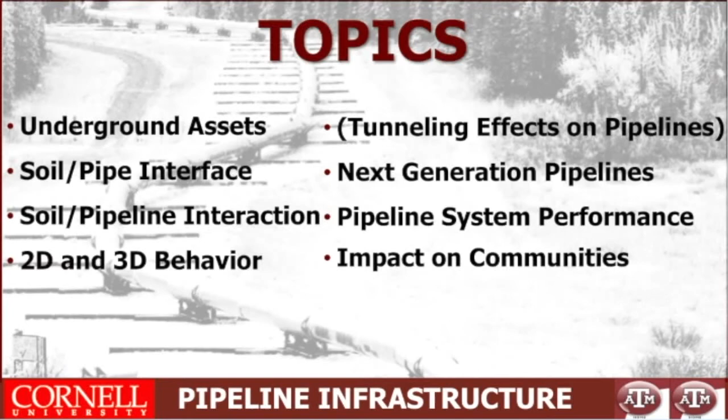The topics I'm going to cover today are our underground assets, the soil pipe interface, soil pipeline interaction, 2D and 3D behavior, the next generation of pipelines, and pipeline system performance and its impact on communities. Let's start with the underground assets.

This is a quick slide with the inventory of pipelines that operate in the United States. As you can see, there's almost 500,000 kilometers of gas and liquid fuel transmission pipelines, and about 2 million kilometers of gas distribution and water distribution pipelines. A recent report by the American Water Works Association values the water distribution pipelines at about $2.4 trillion in place. Since gas distribution covers similar distances, we're looking at nearly $5 trillion of investment in the ground between just gas and water distribution.

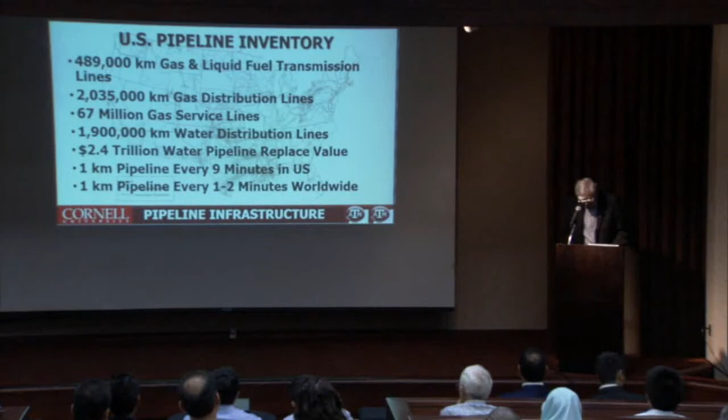That's enormous, and it's very difficult to walk anywhere without being near one. In fact, probably just in this building with internal piping, you're sitting on a pipe right now. The minute you walk out of this building and across the street, you probably cover at least six of them. They're ubiquitous, all over. We take them for granted. They're a national treasure, and like every treasure, we bury them. Then we don't know where they are or what they're doing, and we have to try to come up with evaluations and ways to engineer with them.

Let's take a quick look at the U.S. pipeline inventory, because this factors into the overall philosophy I'll discuss today. If we look at water distribution pipelines by size, about 90 to 95% are less than or equal to about 24 inches, or 600 millimeters, in diameter. For gas distribution systems, using statistics from the Pipeline and Hazardous Materials Safety Administration (PHMSA) in Washington, about 99% of gas distribution pipelines are similarly sized. So the great majority of these are about 2 feet or less in diameter.

And of course we have a lot of transmission lines that go higher than 2 feet. If you're working with water in Southern California, the Metropolitan Water District frequently operates pipelines 4 to 5 meters in diameter—they're essentially mini tunnels.

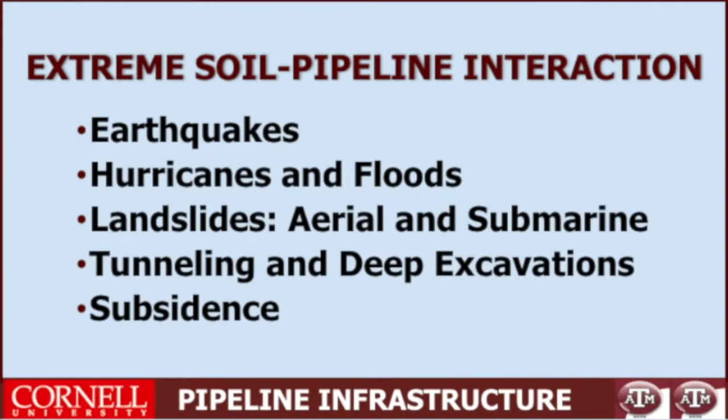Today's talk focuses on extreme soil pipeline interaction—the kind created by earthquakes, particularly ground failures generated by earthquakes, hurricanes, floods, landslides both aerial and submarine, tunneling and deep excavations when movements become large, and subsidence of all types, such as removing petrochemical gas deposits. If you're in areas of California or Phoenix where lots of groundwater has been extracted, you'll find large normal faults associated with these subsidence basins at the margins.

The issue with extreme soil pipeline interaction is the nonlinearities. There are material nonlinearities, for which I think the geotechnical profession and civil engineers have a pretty good grasp—we can account for nonlinear behavior of complex materials, starting with the soil, going to the pipes, perhaps polymers, and linings. It becomes much more complicated when we start talking about composite systems with layered materials, but we can handle that. The real issue in modeling these things is the geometric nonlinearities.

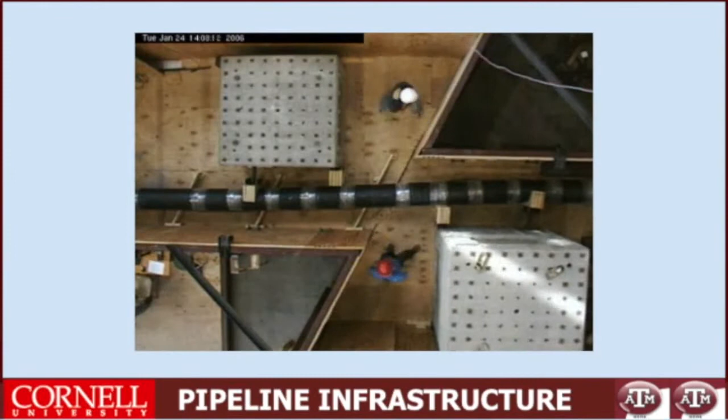Next topic: soil-pipe interface. These are some pictures at Cornell on our large-scale testing facility. This is actually looking at a strike-slip movement with no soil, so you get a sense for how the pipe is bending and stretching. This happens to be a 400 millimeter, or 16-inch, high-density polyethylene pipeline.

So this is where the rubber meets the road, and we tried to take a close look at this behavior using tactile pressure sensors. These are resistive ink, sort of geotextile sensor systems. The one we used on our 400 millimeter diameter pipeline was about 50 by 400 centimeters in plan, and it contained about 2,000 measuring units.

You get the voltage drops across all those, and with the voltage drops you can relate that to local pressures, then use special visualization software. You can characterize the distribution of pressures along nonlinear surfaces. This happens to be a circular surface, and it's along that circular surface that you generate friction. Friction causes the pipeline to differentially stretch or compress and develop strains.

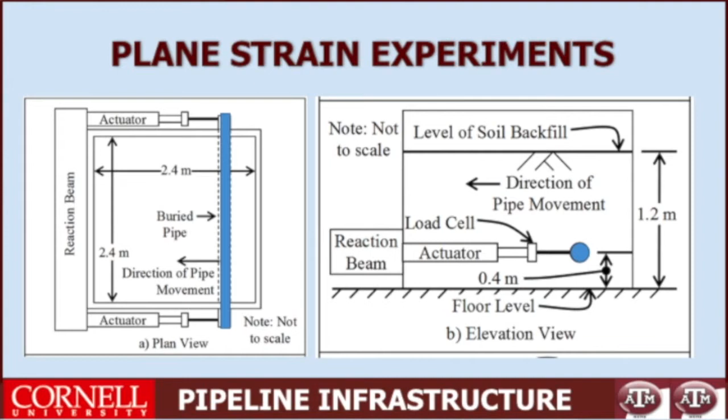We tried to understand that by running a series of tests for plane strain movement of the pipe through the ground, so we had controlled deformation conditions. We could then model that as a two-dimensional soil structure interaction, and we also used our tactile pressure sensors to understand what was happening at the pipe-soil interface.

What a tactile pressure sensor does is measure the stress normal to the exterior surface of the pipe. But we can decompose the stresses on the pipe into their horizontal components. We're going to have a normal component at one location, and we're going to have a tangential component. We can decompose both of those into their horizontal components, and we can integrate.

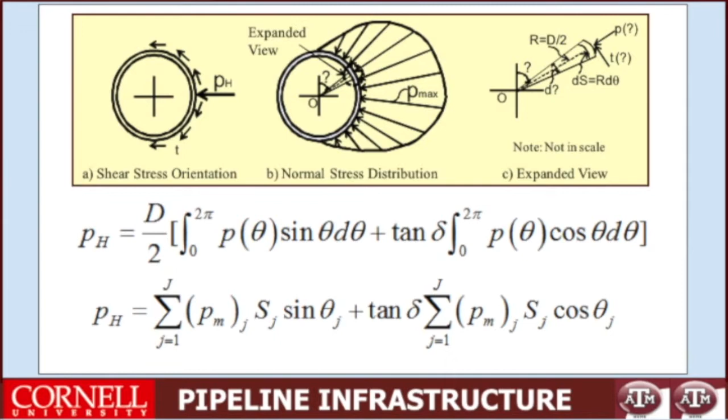This is showing the integration in closed form, and this is showing the integration in numerics, tailored to the type of measurement we're making with the tactile pressure sensors. So we can come up with a horizontal force per unit distance that we can plug into a two-dimensional soil structure interaction model. This is showing the actual measurements from some of these tests with the tactile pressure sensors — these are normal stresses to the surface, the ones that generate friction. We can take those normal stresses through many different measurements and many different tests.

This represents about 27 or 28 separate sets of measurements, regressed into a dimensionless pressure distribution where we have the normal stress at any angular distance normalized with respect to the maximum stress, giving us a sinusoidal characterization for that stress system.

Just for interest, we took some of the plane strain two-dimensional soil structure or pipeline structure interaction models we did, and looked at the normal stresses generated by those numerical models. They followed very closely the distribution we were getting in the tactile pressure sensors.

So we can characterize the true longitudinal friction generated along that pipe by horizontal movement into it. That has to be a function of a three-dimensional transfer of stress. We've got the normal stress transferred around about 180 degrees of the pipe, because as the pipe moves through the ground, it tends to pull away from the soil behind it.

We can take that normal stress and multiply it by the tangent of delta, the angle of interface shear resistance, and then compare that to what I'd call the apparent force. When we do the numerics, breaking this down into two-dimensional soil structure interaction, we're looking at the horizontal force per unit distance, and that does not generate the true frictional force.

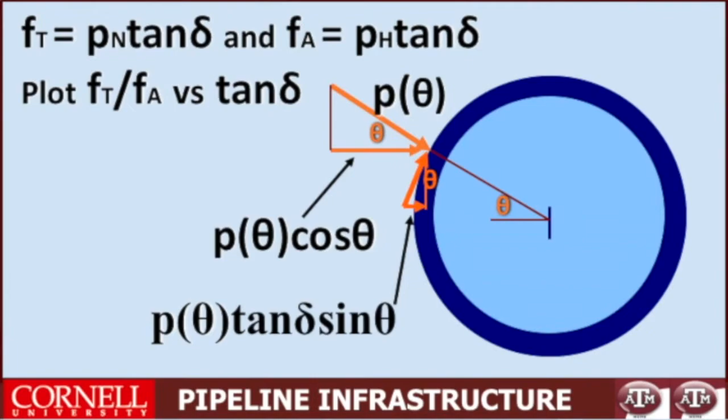However, from our measurements, we can take the true value, divide it by the apparent, and get a conversion factor that allows us to go from a two-dimensional characterization of force perpendicular to the longitudinal axis of the pipe in the simulations to a three-dimensional circumferential transfer of normal stress, then transferred into shear stress along the pipeline.

When we do that, we get these kinds of characteristics where we're plotting the ratio of the true relative to the apparent force per linear distance of pipe, relative to the coefficient of friction, or the tangent of delta for the interface friction angle between the pipe and the soil.

We notice a couple of things. If we coat that pipe with, as we often do, a polyethylene or some form of fusion epoxy, we get a tangent of delta between about 0.4 and 0.5, and no correction is necessary.

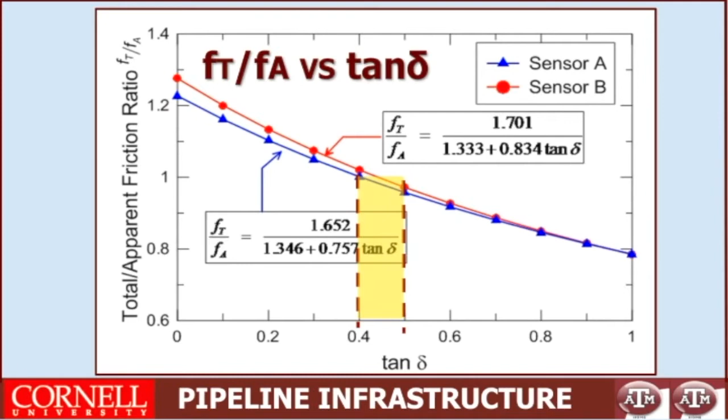However, if we have bare steel, which tends to get rough and develop some oxidation, or if we have a concrete pipe or concrete-covered pipe, often found in water distribution and water transmission, you have to make a correction here because you're over-characterizing what that shear transfer is going to be.

We went further, looking at our sensor measurements and a number of numerical results, which I'll talk about in a few minutes, for lateral movement, upward movement, and downward movement. We did the same characterization of true relative to apparent versus tangent of delta, and they all follow a very narrow range. This characterization works in all different directions, as far as we've been able to show.

We can characterize this with some sort of curve that allows us to make the corrections from a two-dimensional into a three-dimensional enveloping friction transfer function.

So what do we do? We create a model in our finite element modeling. We use Abaqus, which has a very nice library of different elements we can adjust. We can put gap elements in here, controlled by the Coulomb friction law.

When we do that, we have a coupled horizontal force displacement relationship that generates a true representation of our longitudinal friction down the pipeline.

Lessons from soil-pipe interfaces: the relationship between soil force normal to the pipe surface versus force normal to the pipe longitudinal axis is really key to understanding coupled soil-pipe interaction modeling.

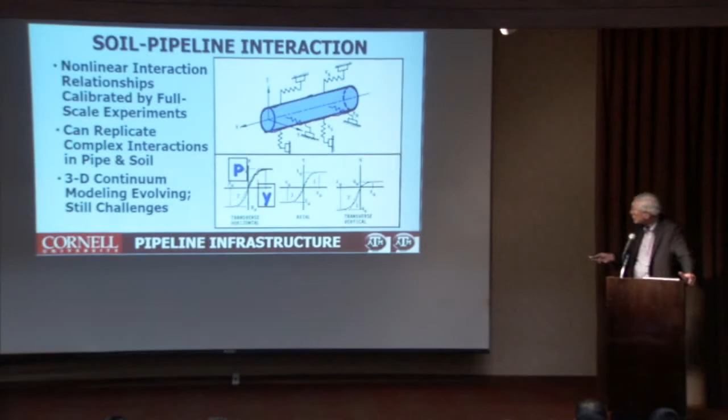What we do now is account for some very complex nonlinear force displacement reaction, which we've been able to characterize, scale, and project to other dimensions and other kinds of soils, looking at this two-dimensional transfer between stresses in terms of movement and interaction with the pipeline in a pretty comprehensive way. So we can replicate complex interactions in the pipe and soil.

We also notice there's been tremendous three-dimensional modeling developments in the last 10 years. These are examples of some really significant papers that have made great advances in solid element modeling around pipelines. One of the very best is Vazouras et al., 2012. If you really want to read a great paper about three-dimensional modeling of pipe fault abrupt deformation interaction, that's a really good one.

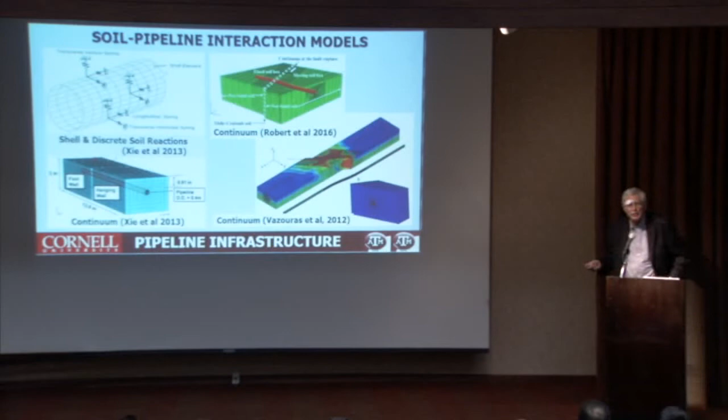One of the advances we can make is appropriately accounting for this coupled horizontal, vertical, or transverse deformation in terms of the frictional resistance along the pipe.

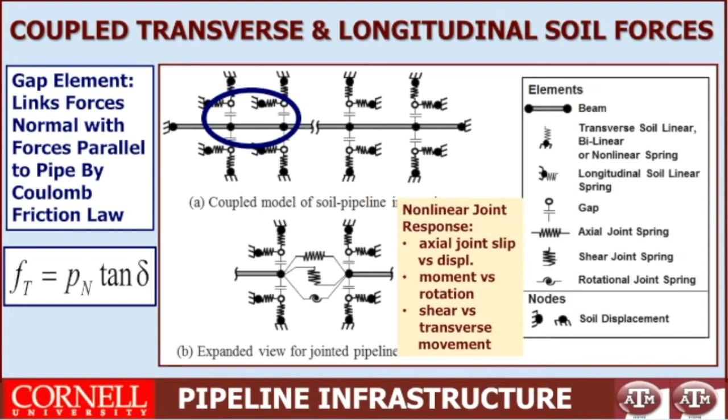We're also able to characterize the nonlinear joint response if we're dealing with pipelines that are segmented, looking at nonlinear axial joint slip versus displacement, moment versus rotation, and shear versus transverse movement.

We've also most recently been able to account for axial joint slip and progressive slip transfer to other joints. Some of the ways these pipelines accommodate large ground deformation is that they slip several inches axially, then lock up and develop a resistance to that force. As they deform more, that transfers the deformation to the next joint down the pipeline, and it slips and locks up. We can do this.

We can do this with great accuracy now, actually duplicating these large dimensional tests and showing how the pipeline opens up en echelon, jumping back and forth across the fault as you pull the pipeline apart and get it to slip.

We can look at load drops across the bell and spigot joints, which in some special joints are very enlarged bells that act as little anchors. If you don't account for the stress dropped across those, or the load, you'll underestimate the axial force the pipe ultimately has to carry for a given level of deformation, which would be unconservative. So there are some tremendous advances.

One of the things we like to recognize in our work at Cornell is this relationship in the direct simple shear test between plane strain and direct simple shear. We know the plane of rupture in a direct simple shear test is a plane of zero extension. Recognizing that, along with the coaxiality of strain and stress in terms of Mohr circle characterization for the direct simple shear test, based on work done by Davis, the great Australian geotechnical theoretician, we can come up with a relationship between direct shear and plane strain.

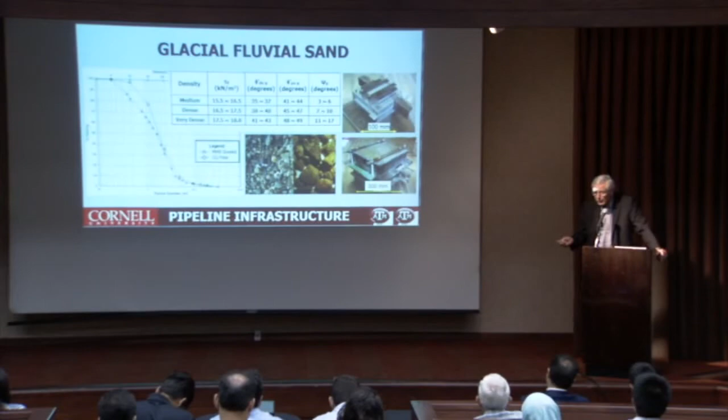Notice that we have focused on soils that are dilative. Contractive soils tend to collapse, and they're very difficult to characterize. Our recommendation would be that if you're dealing with a contractive sand, which you typically don't want when backfilling a pipeline, but if you are, just use the model for medium dense. It'll give you a conservative but not overly conservative estimate of the interactions.

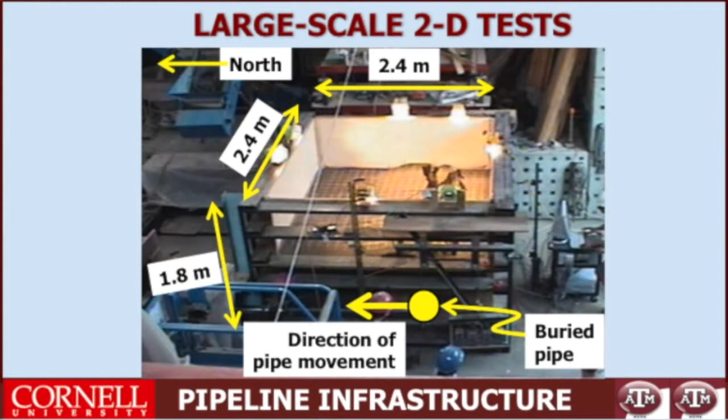So here's some of the tests that we performed, and then we developed our plane strain finite element analysis with a model that uses a Mohr-Coulomb yield surface, has strain compatible modulus in it, and also a strain softening routine to go from peak to residual shear stress.

If we take our data and compare it to our best large-scale laboratory tests, looking at the dimensionless force relative to dimensionless displacement - that's dimensionless force divided by the depth and diameter and unit weight of the soil, relative to dimensionless displacement, which is the relative displacement between pipe and soil divided by the diameter - we really can achieve a remarkable degree of fidelity between our large-scale test results and the actual model we chose to look at for those interactions.

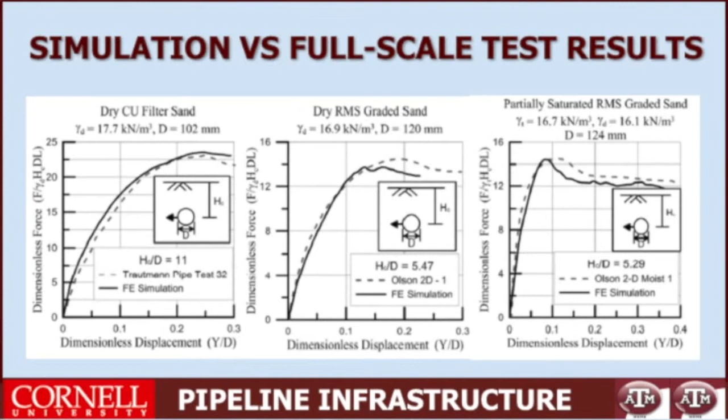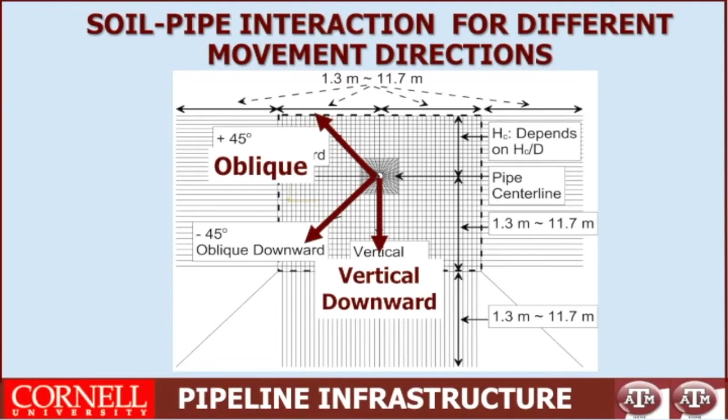In this case, it's the centerline depth of the pipe divided by the diameter of the pipe, both for lateral force and uplift. So with that encouragement, we can build off of that kind of validation and extend our plane strain two-dimensional finite element analysis to look at vertical downward movement, and then all degrees of oblique displacement between the pipe and the adjacent soil. We have semi-infinite finite elements on the margins, and we systematically go through these force displacement relationships in the various orientations.

Looking further at why we have a difference here: as the pipe is pushed down into the ground, the soil moves up and around and fills in the void behind the pipe. So it's not similar to pushing down a bearing element for which you're getting the bearing capacity relationship. That one is far more constrained in terms of the theoretical model results relative to what's actually happening as a pipe is pushed forward.

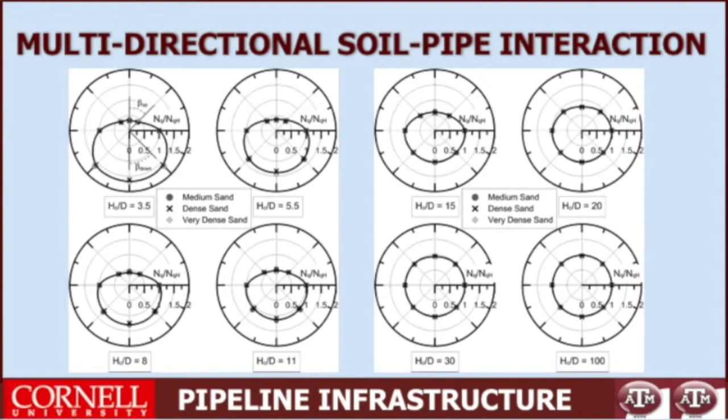In one set of diagrams here, we can characterize for all different orientations and depths of burial a complete force displacement representation for the pipe's interaction with the soil. As you can see, when the dimensionless depths get deep enough, it becomes symmetric, circular around it, because the pipe is so deep it doesn't realize it's shallower buried and you have less force going upward than downward, and so forth.

We've also gone through and characterized the force displacement relationship. Once you know the maximum force, which sits at the top here, we've used a rectangular hyperbolic formulation, very well known in geotechnical engineering, and also a bilinear one. In some of our recent papers, you can specify what this force displacement relationship is for different obliquities of relative movement between pipe and soil by picking parameters A and B. For example, for the horizontal dimensionless forces and normalized displacements, these parameters A and B are 0.2 and 0.82, giving a nice nonlinear characterization, or you can look at a bilinear characterization.

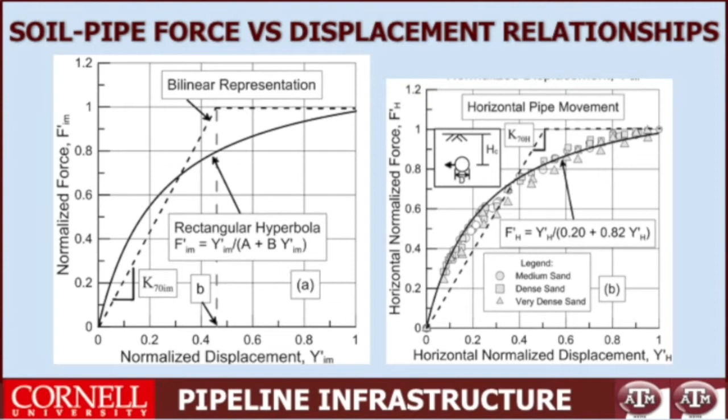The final piece is to recognize unsaturated soils. Generally, unsaturated soils are our friend—they're partially saturated. If you want to induce shear on an unsaturated soil, like worrying about slope stability, it has suction that gets mobilized and enhanced strength. So if you ignore the effects of unsaturated soil conditions, you're generally safe because they're giving you additional capacity you're not accounting for. But when you're pushing a pipe, or pushing the ground against the pipe, and you're ignoring suction forces, you get a force that's just plain too small. We need to characterize this.

We worked with Kenichi Soga and his group in Cambridge, a recent paper published in the Geotechnical Journal, to analytically evaluate this, run the tests, and compare against large-scale tests at Cornell and large-scale tests on a different type of sand at an equally large testing facility at Tokyo Gas. So you have two different organizations running different types of sands through which this analytical or numerical comparison is being made, and therefore validated by two different labs, at two different scales, and two different types of soil.

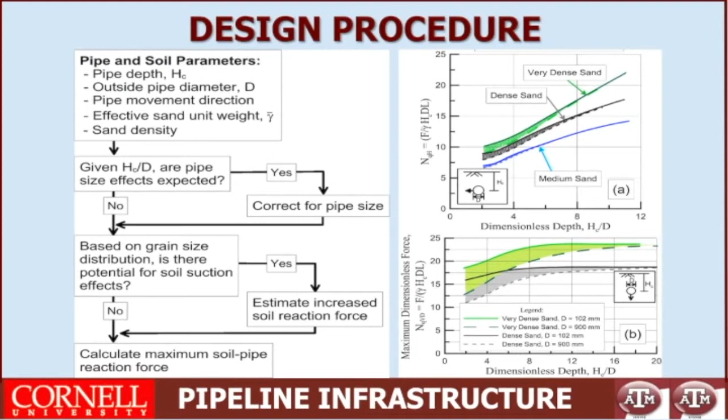If we stop up here and say yes, there are pipe size effects—remember, our characterizations, this one for lateral and this one for vertical downward, are based on dimensionless depth. You could have a pipe with a diameter of 6 inches whose dimensionless depth of 4 is relatively shallow, and you could have a pipe that's 36 or 48 inches in diameter whose dimensionless depth of 4 is a lot deeper.

And remember, our model accounts for dilatancy. So when you have lower confining stress, your dilatancy angle is much larger and you have a higher relative force, whereas as you get deeper, the suppression of the dilatancy angle actually results in a lower force reaction.

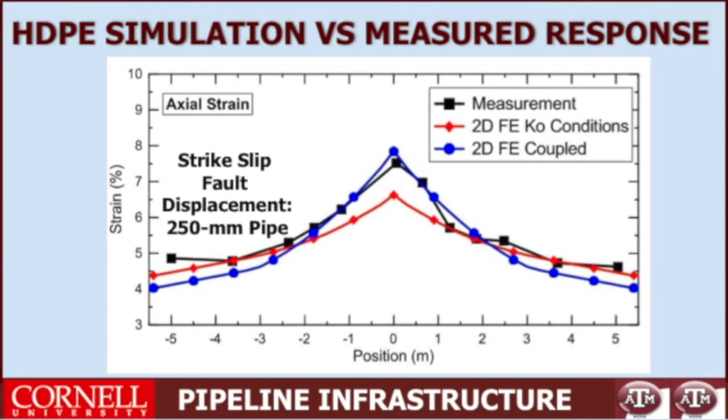So looking again at some of our test results, when we incorporate these findings and look at our measurements relative to these true coupled reactions and characterizations, we find that we get extremely good comparison with both measurement and with the analysis procedures we've been able to develop.

A legitimate question is: if I'm using force-displacement relationships based on a plane strain formulation, can that work for a pipeline that's being deformed? Sometimes they are deformed, and plane strain, like for a landslide, could be the dominant mode of deformation, but other times, at a fault crossing, that's not necessarily going to be true.

But characterizing it in terms of plane strain provides a consistent, rational basis so that our models and test results are consistent. And when we use these formulations with real three-dimensional deformation conditions, we do get good comparisons—they do hold true.

So our lessons in terms of soil pipeline interaction: we have an integrated methodology for soil-pipe interaction. It's really for depths greater than or equal to 2. It turns out that at shallower depths, things get a little more complicated, and we can't claim to cover those depths. But my comment is, if you're in this depth range, just use a depth equal to 2 or slightly larger, and you'll get a very good approximation.

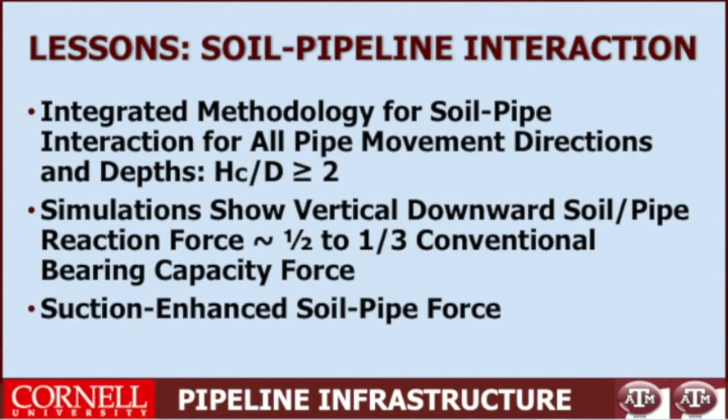Simulations show this vertical downward soil-pipe reaction as being one-half to one-third of the conventional value, and then we have a way to characterize and account for the suction-enhanced soil-pipe forces.

Okay, so the next topic is 2- and 3-dimensional behavior. I'm going to go relatively rapidly on this because I don't want to use up any more than my allocated time. As I've indicated before, we can now characterize this sinusoidal distribution of pressure around a pipe, and we can take frequently used diameter-to-thickness ratios. We can apply that force as a following force.

In reality, it's not a uniform force. There's going to be arching. As this force starts to interact with the pipe and the pipe starts to deform a little bit, there's going to be arching and reduction of this force. So this is actually a conservative test.

We're looking at applying the force and seeing if this pipe ovals when we model it as a shell element, as a simply supported structure, with the actual approximation of the interaction force between the pipe and the soil. When we run through these tests, applying that load, and get the results out, what you see is the diameter reduction in terms of percentage diametrical strain.

You can see at about 600 millimeters to maybe 750 millimeters, we have this rapid increase in out-of-plane deformation of the pipe. So what we see is for steel pipe and cast iron pipe, where we're following the stress state, this is a brittle failure, so if your stress gets too high, you're in trouble.

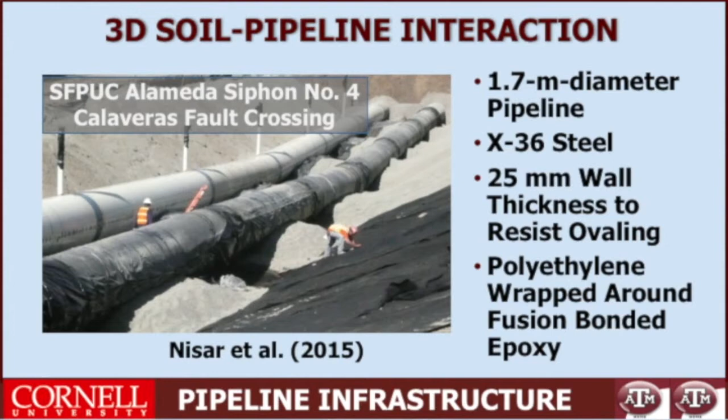Okay, so next generation hazard-resilient pipelines. Real quick in terms of historical development, this is Craig Davis. When he was the chief geotechnical engineer at Los Angeles Department of Water and Power, and he had gone to Japan a number of times, he asked U.S. pipeline manufacturers if they could build a pipe like Kubota pipe, which has been built and tested in many earthquakes.

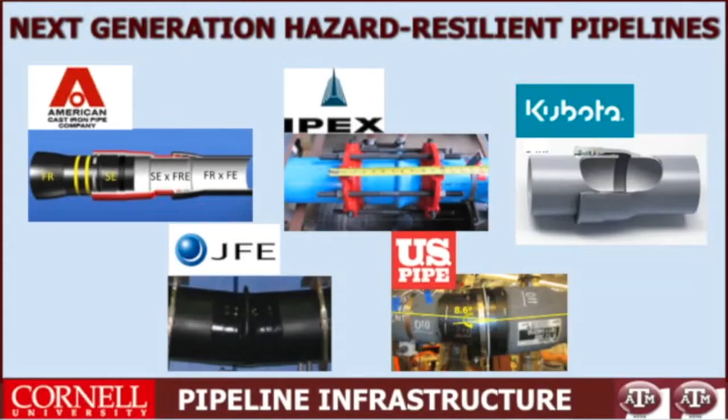It's a ductile iron pipe. It has joints which will expand axially, will move in compression axially, will rotate a lot. It's a shapeshifter—it rotates and changes length. And they said no. And then he turned around and gave them a huge contract, and that generated so much innovation from pipeline manufacturers, because a little bit of competition goes a long way when you're talking about millions and millions of dollars with these water agencies in terms of orders of pipe. And so many people stepped forward with really innovative ideas.

So far at Cornell, we have qualified these 5 types of shape-shifting pipelines. We're working on another 5 because IPEX has come back with an expanded bell—now it not only stretches, but it moves in the bell. It can accommodate all sorts of deformation. And this is a cured-in-place pipe lining system, an Aquapipe, which we hope to be testing next. And we test them in our large-scale testing facility.

Here's a picture of some of the tests that are going on. We actually did the protective vault for the Bay Division pipelines 3 and 4 for San Francisco Public Utilities, where it crosses the Hayward Fault. This was a 1/10 scale model, so we could model how the various blocks were moving back and forth. And we came up second for an Opal Award on that.

We were part of the design team, actually took it to 60% design. And there's a picture of a...

Molecularly oriented polyvinyl chloride - that's where you expand the polyvinyl chloride while it's still hot in the fabrication process. You orient the molecular chain so that you enhance your tensile capacity. When you enhance your tensile capacity, you can sustain a pressure at a smaller wall thickness. And it's not so much the ductility of the polyvinyl chloride, but it's that reduced wall thickness that provides for that flexibility in a transverse direction.

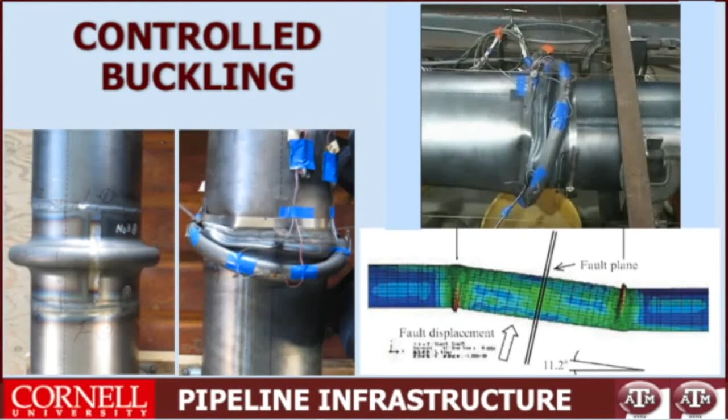And this is an amazing piece of equipment. I'm always amazed. Here's what it looked like as it came out of our test.

This one is designed for compression, because if you get into a compression zone, pipelines are thin-walled cylinders, and they don't like to be compressed. So these people have found a way to get it.

So here's what happened after we subjected it to the fault deformation. Here's what it looked like before. Here are these wave features that start the buckling process. So you can see this started out this long - it's now a lot less long in the longitudinal direction. And because it starts to rotate, because there's an oblique fault movement on this thing, as it starts to rotate, it actually absorbs more axial compression as well as rotation.

And this is what the pipeline looked like inside. It still maintained 80 to 85% of its throughput after excessive compression deformation.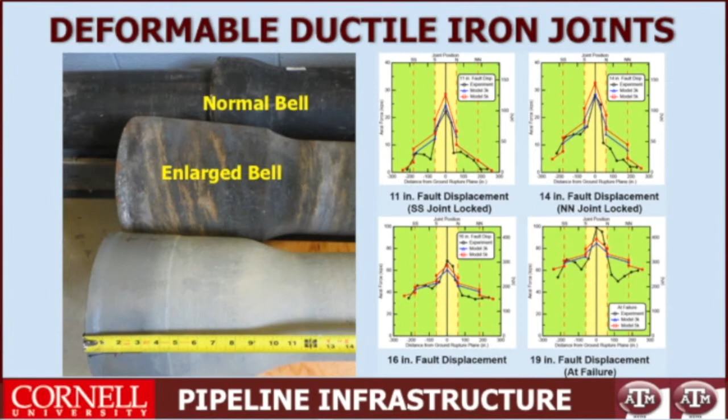Other things we've been able to do is look at these enlarged bells - pipelines that actually allow for this axial movement back and forth. This is a Kubota pipe. This is a U.S. pipe that's been manufactured similar to Kubota, their own special design. And if you account for the load that's dropped across these bells, we're showing here our comparison of our analytical models with the actual large-scale tests, we get really good comparisons. We are dropping about 5 to 7 kips across each of these bells. If you don't account for that in the modeling of the pipe, you're going to be under-conservative for sure.

And all our results from all the different companies are put immediately up on this website, and anybody can go there, take down our reports, read it, have access to it. It's open for everyone, because if you're going to do something in this kind of context, it needs to be transparent. Everybody should have access.

So, lessons learned from next generation hazard resilient pipelines: this is a paradigm shift in pipeline technology, building pipelines that are shapeshifters. It's a market-driven research model.

We don't receive a penny from NSF or the federal government or anybody else. This is all coming from private industry, and we're as busy as we can be. You can't have resilience unless you have a market. If only one company is providing you with a shape-shifting pipe, they can charge whatever the market will bear.

But if you have competition, you have a market. You actually can get a better price, but what's more important, you can get innovation. You get lots of different people's ideas, and I hope I've shown you in some of these examples that some of these ideas are really novel and very interesting. So not only are we generating the next generation hazard resilient pipeline, but we're also helping to develop the next generation hazard resilient pipeline simulation models, because accounting for these geometric nonlinearities requires some special modeling processes, and I hope in this lecture you understand our philosophy in terms of how we're approaching that problem.

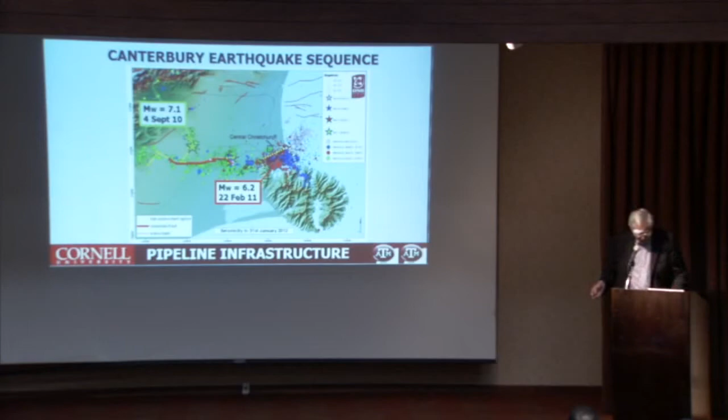And the consequences here were quite severe. There was another one on June 13th, another one on the 23rd of December, and then one more recently that didn't have a significant impact on a lot of the built environment, but it also produced some extraordinarily valuable data.

So if we were to take our GIS shapefiles and plot those, these were all generated by Tonkin and Taylor, who formed teams to go out and map the liquefied areas of Christchurch after each of the earthquakes of the Canterbury earthquake sequence. For the first one, the 4th September 2010, we got about 52 square kilometers. For the one that did all the damage, we have about 96 square kilometers. These are all very large, massive liquefaction type effects. Then in the June 13th event, we have 91 square kilometers of effect. That's a lot of soil that's been affected by soil liquefaction. That 96 square kilometers is about 66% of the Christchurch metropolitan area.

Now, a lot of people aren't familiar with Christchurch, so I created a scale called San Francisco. Here's a map of San Francisco, and here are the shapefiles for the liquefaction zones measured and documented after the 22 February 2011 earthquake. When I move one on top of the other, you get a sense for the scale of the liquefaction in Christchurch. It was 1 Frisco large.

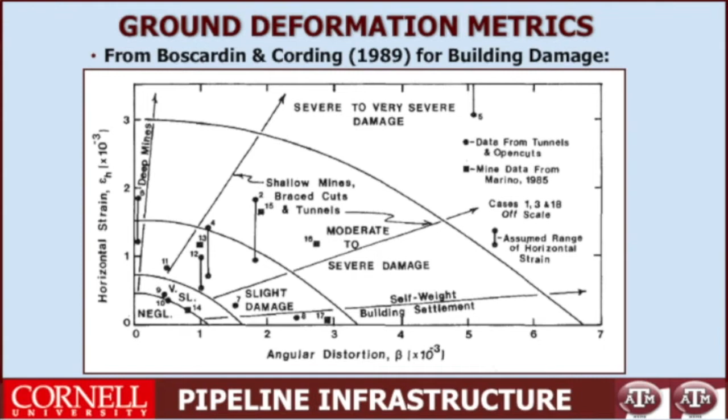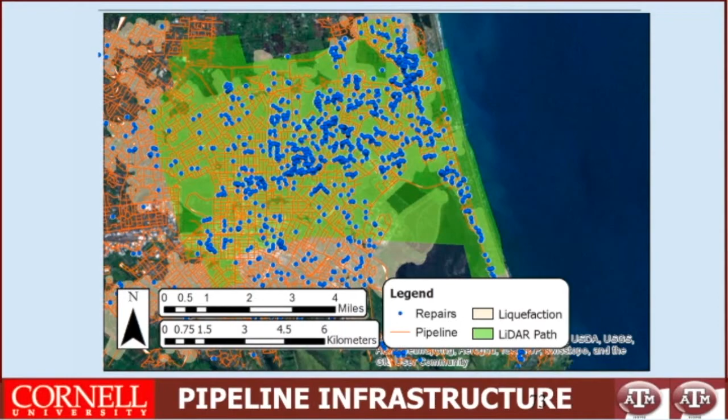We go 4 by 4 meter square or 5 by 5 meter square, count up the number of repairs and the kilometers of pipe of a particular type, divide to get a repair rate, which we break into bins to show correlations between the permanent ground deformation in terms of angular distortion or lateral strain and the repair rate for the pipeline.

One more thing about the lateral strains: you get northing and easting at these 4 by 4 meter apexes, and that's a finite element. So we take the finite element formulation, characterize the strain state from it, and pick the maximum strain for the correlator, since that's a unique value representing the strain field within that square.

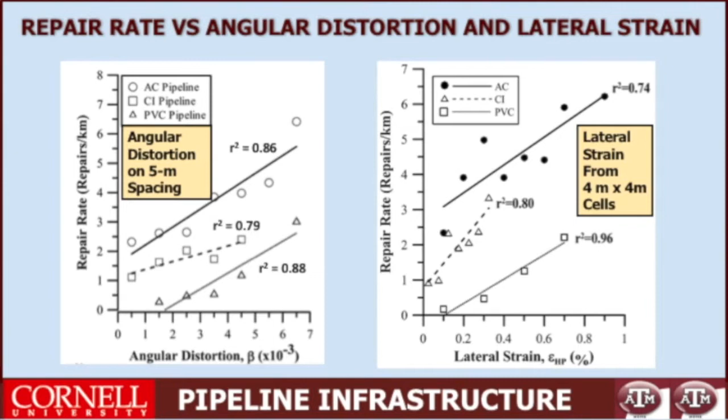Why is that? Because some of those points were affected by lateral strain that you're not accounting for in angular distortion alone. Similarly here. But when you combine the two and develop linear relationships between lateral strain and angular distortion, color coded by repair rate, you have a unified way—consistent with how we characterize building damage from ground deformations—to look at correlations we'd expect between pipeline repair and liquefaction in future earthquakes, because it's fundamental whether you look at it as angular strain or lateral strain.

So coming back to the measurements in Christchurch, we can add up all the lateral strain measurements—tensile lateral strains, for example—or all the angular distortions. I'm illustrating with tensile lateral strain, and we can develop cumulative frequency plots. There are millions of points involved in these plots.

These earthquakes, because of what the New Zealanders did with the high-resolution LiDAR, are the biggest laboratory-scale test we're going to get for a while on infrastructure response to liquefaction, in a way that can be quantified. The types of pipelines we've been testing at Cornell are able to accommodate tensile strains in the range of about 1.5 to 2.

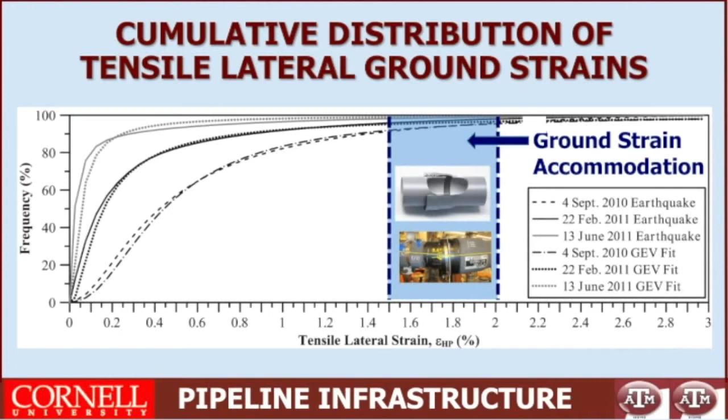When we extrapolate backwards to how they would have performed in New Zealand, they would have been able to accommodate about 95% of the cumulative distribution. We like to show the data this way and qualify performance this way because it's truly a system way of doing it. No pipeline can survive all the deformation that can be served up in a major liquefaction event, but you can build a shapeshifter that can accommodate most of it. This helps us quantify that, and the water companies seem quite comfortable with it.

So there are our exceedance levels. All right, lessons from Christchurch—I'm going to skip that and go immediately to the last topic. I don't want to run out of time, and that brings us to San Francisco.

San Francisco is a city of earthquake-resistant buildings, Transamerica Tower, some well-designed seismic structures, but a lot of people forget that 96% of the building stock in San Francisco is timber frame structures, which means that fire following earthquake is the big hazard here.

There's also huge wind in San Francisco, and wind and fire don't mix well—that means we have a serious hazard. In fact, 1906 is still the greatest single fire loss in United States history, with 490 blocks of the city burning to the ground and another 35 or so severely damaged.

What has happened in the last couple years is that San Francisco has passed two earthquake safety and emergency response bonds, one in 2010 for $412 million, and another in 2014 for $400 million, to fix their auxiliary water supply, which is the fire protection backbone of the city of San Francisco.

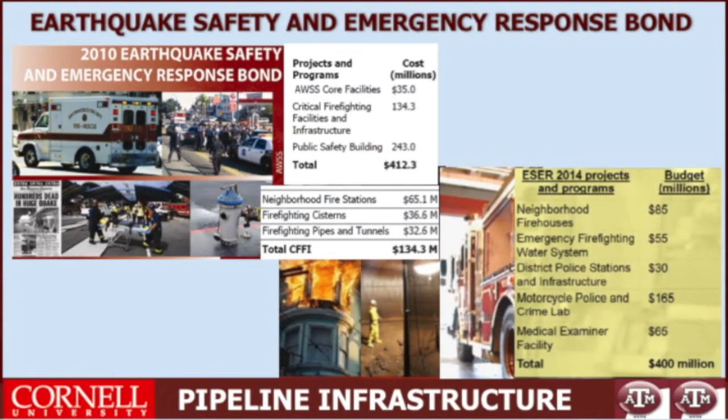And we used, in this first bond issue, the measurements from New Zealand to simulate what would be the behavior of the auxiliary water supply system and be able to accommodate fires that would be generated in San Francisco.

The way we did that is we went to the fire department, and the fire department said, if you want to run performance, spatially distributed performance, then you need to look at the response of the pipeline system relative to the fire demand.

And if you're going to look at it relative to the fire demand, you have to look at the fire response areas. That's how we characterize the fire demand in San Francisco, because each of these 37 or so fire response areas is centered on a fire station.

So you can characterize the demand in terms of fire following earthquake, and Charlie Scawthorn, who was working on this project and is very well recognized for this kind of work, did that.

We used the water supply simulation models developed at Cornell. AECOM was using them, along with these New Zealand models for correlating liquefaction-induced ground deformation with damage in the pipeline system, to actually say what the water supply could perform.

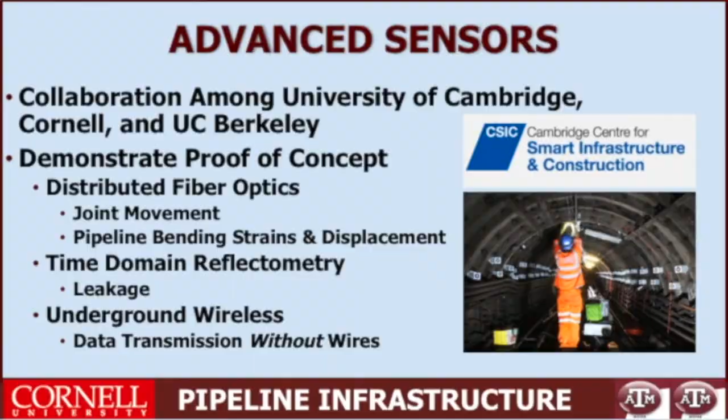So we are currently working with the University of Cambridge and the University of California at Berkeley with Kenichi Soga and his group. They used one of our very large-scale tests this last summer as proof of concept for extreme soil-pipeline interaction and ground failure, using distributed fiber optics to measure pipeline bending strains and axial distortions, joint movement, time domain reflectometry to measure leakage, and underground wireless to get the signals out of the ground. We compared them with our very good instrumentation results, and they compared extraordinarily well.

So you can't have resilience unless you have intelligence. I call this the IQ factor. We can take the best of our technology now—some of these shape-shifting pipelines—and put them in the ground, and they have a high IQ today. They're the best that we can do. Twenty years from now, they may be stupid.

The only way you can keep up is to put intelligence into your systems, to be able to perceive what needs to be fixed, to be able to monitor things, and to have an integrated system approach to managing and improving your lifeline systems.

So the last lesson I'm going to talk about here is the intelligence. The intelligence and the community and the humanity of these systems are what makes them exciting and what gives us pioneering possibilities.

And what makes it an extraordinarily interesting and exciting field to be in. So I hope in delivering this Terzaghi lecture with my Terzaghi badge on that I've been able to encourage some of you to follow up and look into this whole area a little more vigorously, because it really does a lot of good for a lot of people, and it's extremely interesting and exciting at the same time. Thank you.

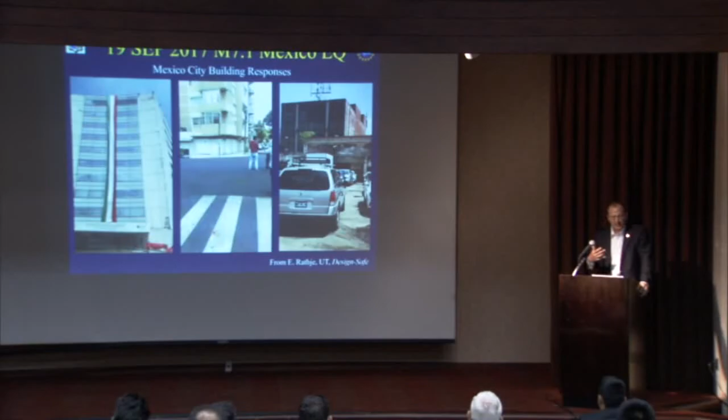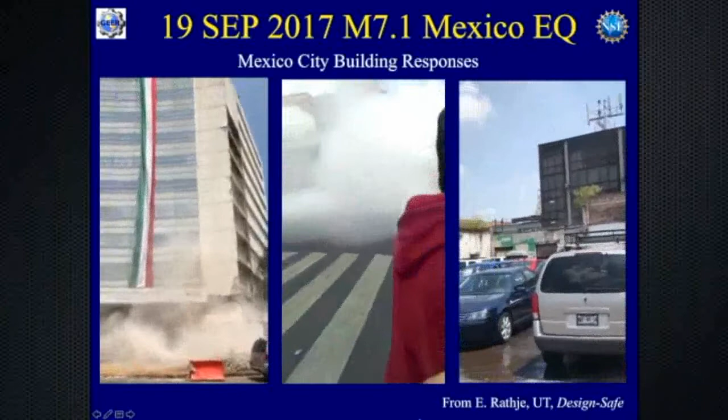The remarkable thing was I was actually in Korea, around 3 o'clock in the morning when I woke up because of this earthquake alarm and started looking at this. Ellen Rathje, who's the UT head of the NSF-sponsored DesignSafe, was scouring the internet, and within a few hours after the earthquake was sending me things like this. So besides recognizing the importance of this event, we started to realize there's a whole new world in terms of capturing data, in terms of seeing how structures with soft stories respond and understanding how these types of structures are developing.

Having these pictures, and having regular people essentially capture this information, is just remarkable in terms of the data that can be produced, in terms of understanding how structures respond to ground shaking, which is a key element of the Mexico City shaking.

0.02% of G. But in the soft area, with the amplification of shaking and structures on top responding to it, is where they had all the damage. Because of that, they've mapped areas in terms of firm ground and transition zones where you have different thicknesses of the lake clay, the soft Mexico City clay, and then the lake area with the deeper deposits. Each of those, because of their stiffness and thickness, has a natural period that likes to amplify the ground shaking. This work would not be possible without the interactions with our colleagues at UNAM. Juan Mayoral is the lead professor working with Tara Hutchinson and Kevin Franke.

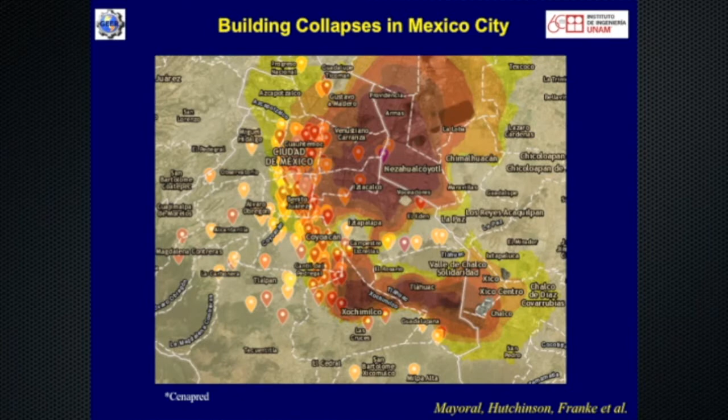This is the initial building statistics in terms of damage. Primarily 5 to 8-story buildings were heavily damaged in this zone, this transition 1, transition 2 zone, or the edge of the lake bed. Capturing this data and understanding which buildings did well, which were partially collapsed, which ones collapsed, and where they were collapsed is going to be incredible for doing 1D, 2D, 3D modeling and capturing that. So we have to capture that perishable data to learn from it, and that's what they're doing now.

I'm working as a peer reviewer on the new airport in Mexico City, and one of the issues is: will we develop significant pore pressures in these Mexico City clays? There's a certain threshold strain that is fairly large because of the high plasticity of that clay, but eventually you could capture high pore pressures. Could we have water come up along the piles? Could we have foundation issues? There's some records of that in the 1985 Mexico City earthquake.

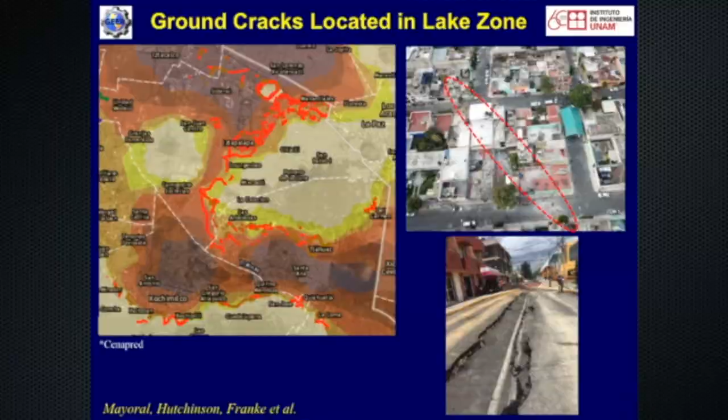GEER has been active because we understand, and the people who volunteer for this, they all do this work pro bono, they realize that geotechnical engineering is an experienced, driven field. I noticed your first invitee for the Buchanan lecture was Ralph Peck - who could you have better than a leader who understood the importance of good laboratory testing and analysis, but always couched with field case histories and the observational method? Because we recognize, as good as our tools get, and we want to keep working on them in the lab, the centrifuge, the shaking table tests, and the computer, we're never going to capture all of the issues in terms of the natural response of natural soil deposits. Field observations shape our understanding, and they provide the data for things such as liquefaction triggering and lateral spreading. But it's personal.

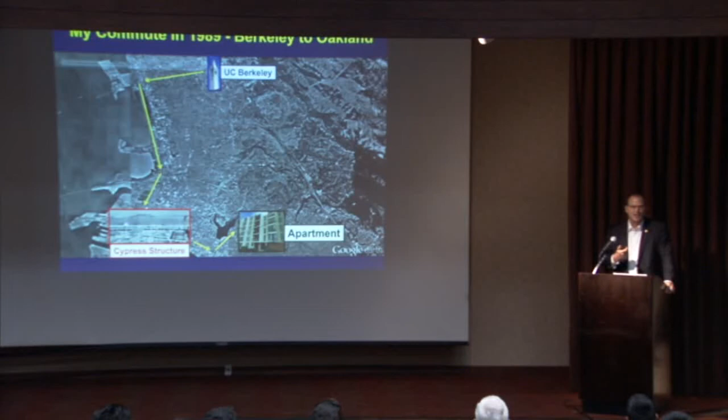I and a lot of people probably would have been on the Cypress structure around 5 p.m. on Tuesday, October 17, 1989, except for the fact that we cheated and went home early that day because we wanted to see the Oakland A's play the San Francisco Giants in the World Series. What's the chance that a major earthquake hits the Bay Area while that game starts at about 5:04? So at 5 o'clock, a lot of people were in front of their TVs waiting to watch that game.

This is the route that I took back from Berkeley that day. That's what the Cypress superstructure looked like before the earthquake hit, and unfortunately, this is what it looked like afterwards. 41 people were killed.

And I should hesitate to say only 41, but it would have been probably 410 or 500, because normally at 5 p.m. on Tuesday, that was bumper-to-bumper traffic. So we were very lucky there.

Now, the structural engineers in the room will talk about, well, that structure is poorly built. It has poor ductility and poor details. But that superstructure only failed on top of the soft clay. It didn't fail on top of the firm ground. So again, it's not just the structure being poor, it's the energy, the shaking, and the intensity being amplified on those soft soils. In fact, this became the earthquake of bridges.

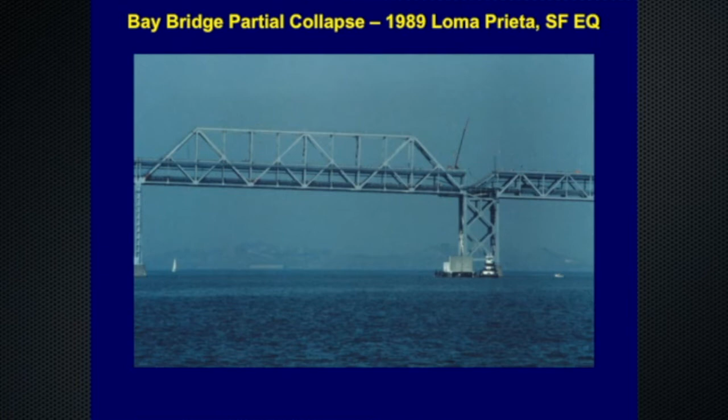We had the Bay Bridge, which cost us $6.4 billion to replace, which we finally replaced about 25 years after the event. And there were other bridges.

I learned another important lesson. In fact, I learned this being one of a family of 9: never ask permission, because you might hear no. We sent teams of people down there. We were actually the 4th group to show up there. Everyone else was turned away.

So I didn't ask the Caltrans inspector there and the police officer guarding the bridge whether I could have access to the bridge. I came there in my uniform and said, 'I'm here to see the bridge.' And they just waved me through.

As Dr. O'Rourke mentioned, damage in San Francisco was severe. Again, there are soft story structures that did not fail on firm ground, on rock, in the Presidio area and other places. The soft stories that failed were in the Marina District and other places that had these soft soils. It's the soft soils amplifying the shaking for these soft stories.

And the fire that started was in the Marina District. Professor O'Rourke can talk about this at length, and I know from talking to Professor Raymond Seed, who was working with the fire department there, and from running the physical fitness tests we used to do in the reserves, it's always windy in the Marina District. If you want to go fly a kite, that's where you go. I think there's only 6 days out of the year where it's not just a stiff breeze. That just happened to be one of those days where there wasn't a wind.

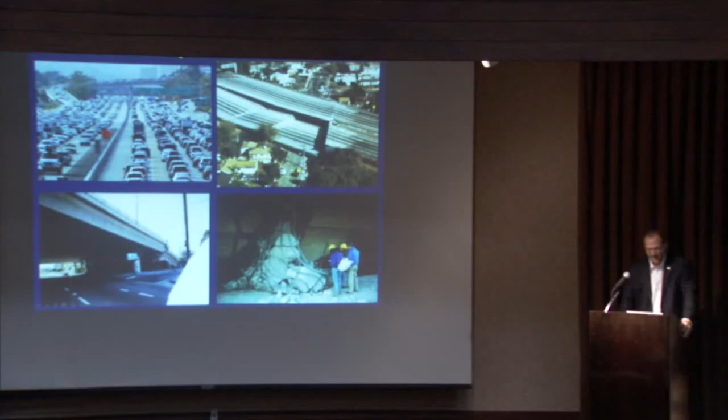This was scary. This was actually a storage facility, and when it collapsed, we had access to it. I saw AK-47s, Claymore mines, and rocket launchers. What somebody in Los Angeles would have that kind of equipment, I don't know, and I don't even want to think about it.

As Professor O'Rourke mentioned, one of the key issues is ground failure, which breaks your gas line. This gentleman starts his truck, he ignites the gas fire, and you can't put the fire out as these buildings burn, because the water supply has been lost. If you lose your water suppression, you can't fight the fire, you lose your ability to fight the fire. This is another broken water line.

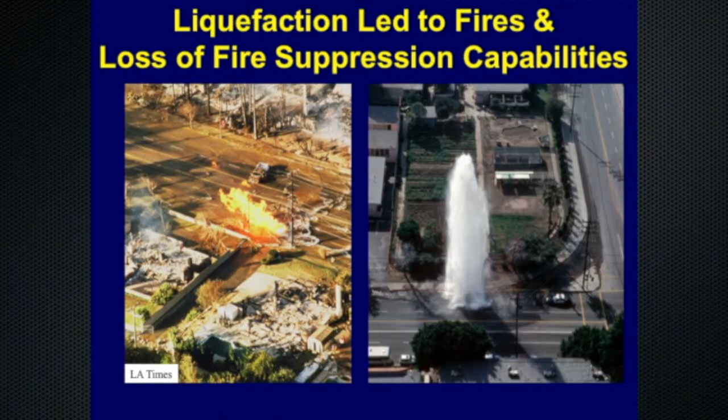Then we have the 1995 Kobe earthquake. They were well aware of the major subduction zone earthquake - they'd had their Kanto earthquake in the 1920s, and so they focused on that. This was an area where they did not appreciate the importance of a direct hit.

Yet this earthquake hit them, and the people who had gotten fairly confident that they wouldn't have the problems they saw when they visited us in '89 in San Francisco and in 1994 in Los Angeles, they lost 6,434 people. A modern country, one of the best in earthquake resilience, lost 6,434 people.

I can show you time histories, but I think one of the best ways to show you is an actual recording of what that ground motion was like. The seismologists had talked about forward directivity and pulse motions - this was us seeing it. It wasn't the normal ground shaking they were thinking about in Japan, from some earthquake far away where they got maybe 2 minutes of shaking that was fairly low in intensity. This was all of that energy coming at them in 1 or 2 pulses.

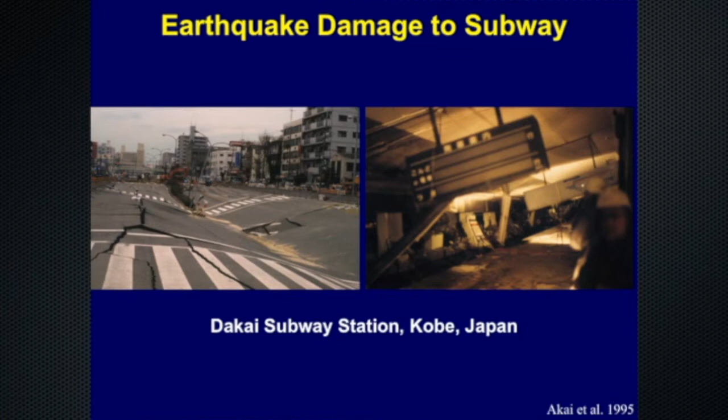Since Kenichi Soga had spent time in Kobe because he went to Kyoto, we talked with people, and you might say well, only 6,000 people died out of a large population. But everyone was touched by death - their brother had died, their mother had died, their sister had died, their cousin had died, one of their schoolmates had died.

This city of 1.5 million, everyone felt it, and it was depressing to walk around and see a resilient people broken by this event. We can't let this happen.

The objectives of GEER are to collect this perishable data. It's terrible that these disasters happen, but it would be worse if we didn't learn from them, and therefore we need to turn disaster into knowledge. We need to develop and implement new technologies, and the whole idea is documenting these effects so we can advance the profession.

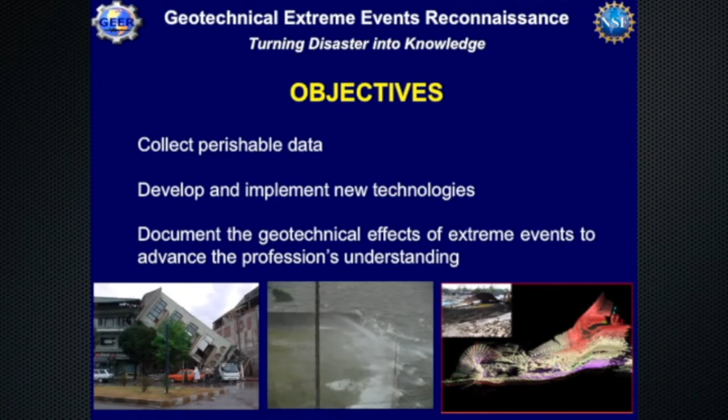At the top of this are the volunteers. The GEER members and volunteers, greater than 400, go to the website and say, these are my skills, I am interested in going to the field, I am interested in participating. I will give up a week of my time in the field, and for every day in the field you get a day in the office pulling notes together to produce the report. I will give up two weeks of my life because this is so important.

It's so important for the profession, but it's also so important for you to learn these lessons, to see these things. I remember in Kobe, I couldn't believe what I saw. I look around and see Liam Finn and Ed Idriss, and they're as shocked as I am. I realize that's not the last shock I'll ever see in my life, that I need to go to these events because I need to be reminded the next time I'm pushed by a client to get close to the edge, what being over the edge means in terms of affecting infrastructure and people.

To help steer this and decide whether we're going to go and what size the response would be, we have a diverse GEER steering committee bringing in people from different backgrounds in different parts of the U.S. We also have an advisory panel, including Professor Tom O'Rourke and others who are geologists, social scientists, structural engineers, and tsunami experts, to help us respond to these events.

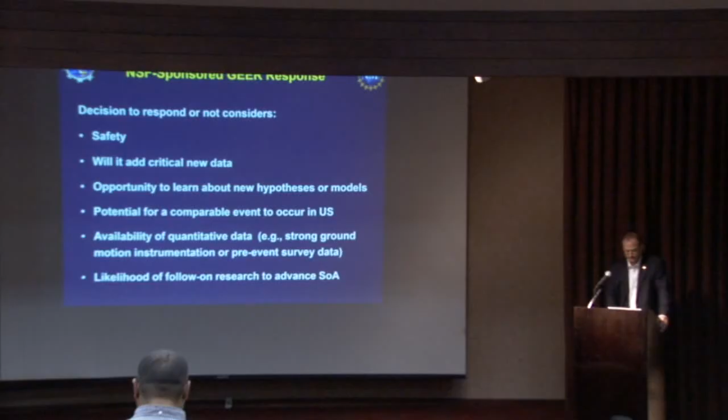In terms of the principles of reconnaissance, I actually first learned how to do reconnaissance as a Corps of Engineer officer in Korea. That was my primary job, besides building things and others: general reconnaissance, getting a sense of the lay of the land and being able to provide the eyes and ears to the battalion and to the other division assets. So the first thing to do is assess the overall damage and identify key opportunities.

Ask yourself always: if we document this, take the care to do this, will it advance the profession? If a loose, saturated sand that's incredibly loose is strongly shaken and it liquefies, do we care? We know that should happen. And a very dense sand that's very lightly shaken - we want case histories that are on the edges between good and bad behavior. We want to document good behavior as well as bad behavior.

It's one of our mantras: one well-documented case history that gets into a thesis and then into the literature and is used by engineers 10 years from now is so much more valuable than a bunch of photographs of damage.

A team approach and systematic collection of perishable data is critical. You want to use remote sensing and UAVs, everything geocoded. Very importantly, while it's useful to think of possible mechanisms, you cannot figure out how something failed while you're in the field - you will collect the data to confirm your hypothesis. It's so critical, even if you believe someone, to challenge them and say let's collect this data and that data. It's so important to just collect the data, get the facts. There's always time to figure out the why.

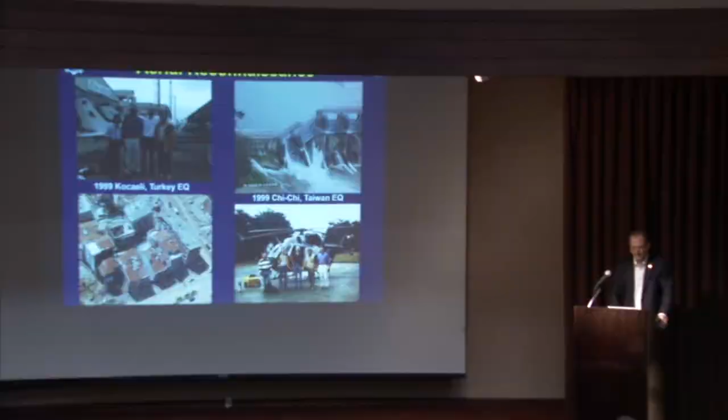I knew that the Navy and Marines had come to Turkey to help in the relief effort, but it had been 7 days and they were not going to find any more people alive in the rubble. I know that military units, having been in the military, when they're waiting for orders, have nothing to do - so why not give them something to do? I said, I expect you to have observation helicopters. Can you come pick us up and we'll fly over Adapazari and take careful photographs with a Navy cameraman? And they said sure.

Everyone wanted to go on this, but I said we'll take Professor Rathje - we only have room for Professor Rathje, me, and the Navy photographer, so that's it. I expected to see an observation helicopter like I used in Korea.

But no, they sent a Super Stallion. A Super Stallion holds a platoon of Marines. It's not only a Super Stallion, it's THE Super Stallion - it had stenciled on it that this was the helicopter that landed under fire in Bosnia and picked up Captain Scott O'Grady, who was shot down in 1995. My son never really respected me for all the work I did - you took soil and moved it around. But when I brought back this picture, and he had just finished reading the book about Captain O'Grady, he said, okay Dad, you're cool.

This is my safest ride: 2 police officers with 2 weapons each. Flying in a helicopter, I feel really safe when I have 2 pilots and they both have pistols.

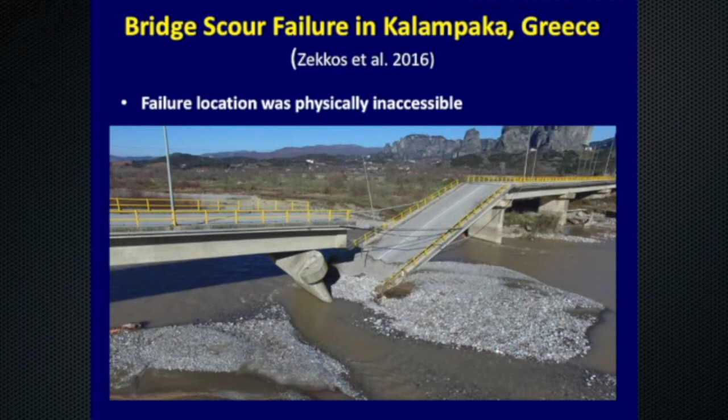And it's amazing - where we used to use LiDAR all the time, we can now start saying... this is work done by Dimitrios Zekkos at the University of Michigan. He's not able to get on this site safely, it's physically inaccessible. But instead of spending days, he can spend 3 hours with his UAV.

He can take 649 high-quality photographs that have markers in them so he can survey in those markers and have different points of view. By having the different points of view and knowing where the camera is and knowing the object they're looking at, it can be reconstructed with this concept called structure from motion.

Therefore, everyone can not only see what the ground looks like from above, they can actually develop high-resolution, detailed mapping. And then once you have this, you know what happens - you can deposit this in DesignSafe, and then people can use this for the future.

Before structure from motion, which has now almost opened it up to everyone, we had LiDAR, such as what Professor Tom O'Rourke talked about in terms of Christchurch. This was the only way to really capture the ground deformation from the Oso slide, where unfortunately in March 2014, 43 people died. This was a large slide.

It had moved a few times, so they actually had a LiDAR survey done in the early 2000s, then one in 2013. So of course you can come back and redo it in 2014 after the failure, and understand where the ground has accumulated, where the ground has evacuated from, and that gives you the data to train your material point method or your analysis to be able to capture that data.

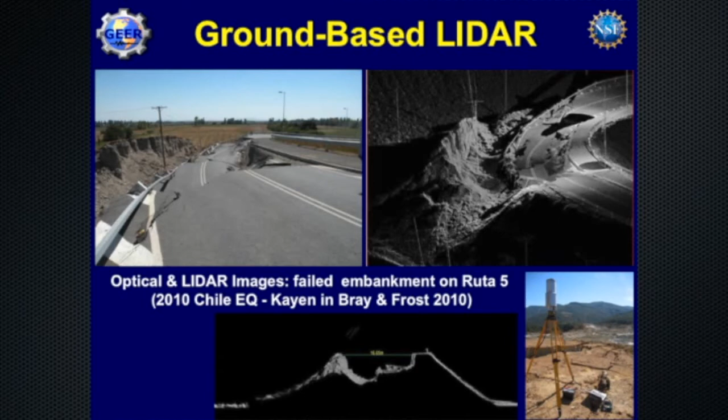Google Earth is amazing. I remember when I was in Turkey, I would have done anything for a map. I just could not get maps. In fact, the best place in 1999 to get topographic and geologic maps of Turkey was from a website in the Soviet Union. I don't know why the Soviet Union would be interested in Turkey, NATO and missiles and all that stuff, but that was the place. So we got some information from this website in the Soviet Union.

Other times I actually had a camera hanging from my chest, and I'd walk in and say, do you have any maps? They'd say no. I'd say, I see a map on the wall. Well, that's not, you're not allowed to have that. I'd take pictures anyway. In fact, the Turk who was with me said, Professor Bray, you scare me. But we did anything just to get a map.

So without a map of Adapazari, how can we map the damage? How can we know where we are? Well, now with Google Earth, I could walk over this ground.

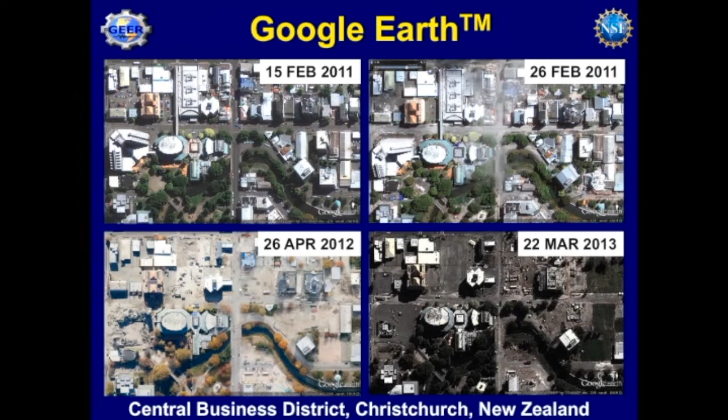It's also interesting to go back and look, because there was an image on the 15th of February, before the earthquake. You can see the non-collapsed building and the collapsed building. And if you're worried about resilience and reconstruction, you can watch with the time version how the city is responding, how the city is building back from that event.

Everything is now geolocated. Everything's digital. The idea of taking slides and handwritten notes, those days are gone. You can pull everything together with Google Earth. You can pull everything together with DesignSafe. You need to be able to share data, and that's a key element. Everything has got GPS these days. Here's a good example where you've got the overall map, the location, the lat-long. You can reoccupy that location.

So talking about earthquakes, I'll use 3 examples, 2 older earthquakes and a more recent earthquake. One of them is Adapazari, Turkey in the 1999 Kocaeli earthquake. You recognize a lot of Turkish names — we always work with the in-country people. Unfortunately, this event killed over 17,000 people.

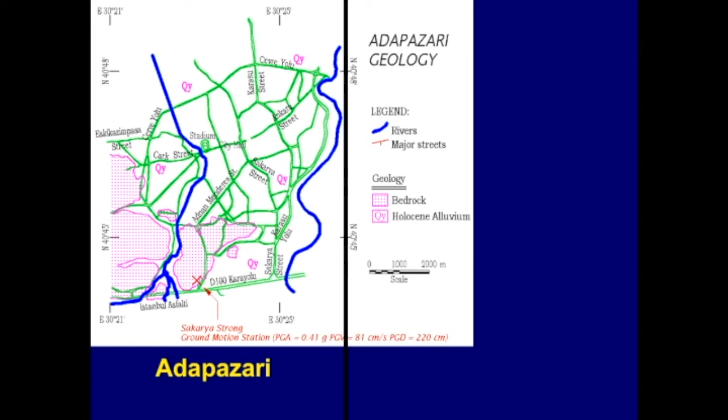Adapazari is called Island Market, so it is an area that's actively fluvial. The river that's here used to be over here, so you can imagine, think about the Mississippi area. This area has had things like a fire hose going back and forth across it, depositing soils.

Using a rapid survey, building by building on a street: is there any ground failure? Is there minor ground failure, a little bit of liquefaction, less than 10 centimeters of settlement, moderate or severe? Severe is some lateral spreading, more than 3 degrees of tilt, or settlement more than 25 centimeters with severe liquefaction. And then what was the damage, what was the effect on the structure?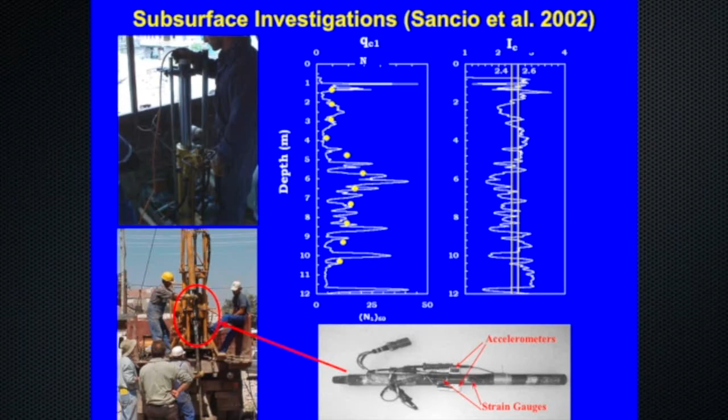Once we have that data - and that data was gone several months after the event - now we can come back a year later with NSF funding, PEER funding, and we can do site investigations. We can start to figure out, does this make sense or not? So cone work, some borings with an instrumented SPT. Then we can look, and if we make a change, a very important change, we can say this...

This ground with that important change has non-liquefiable soil over liquefiable soil - this should not have liquefied - and this has liquefiable soil over liquefiable soil. So we start patting ourselves on the back. We sit there and go, but there's an important change.

What the state of the practice was at that time, based on the 1997 workshop, before this event occurred, was let's readopt the modified Chinese criteria, which has a major deficiency that Arthur Casagrande actually pointed out in 1937. It's not the size of the particle that matters, it's the mineralogy. If you have very, very fine quartz and feldspar that is smaller than 5 microns, it doesn't act like a clay - it acts like a silt, and it can liquefy.

So we have a lot of cases of high clay content in terms of size liquefying, because it's not size, it's mineralogy. That's why he developed the Atterberg limits - well, he didn't develop them, but he used them to basically classify soil. He used plasticity, so we came up with a plasticity-based methodology for saying which soils should be susceptible to liquefaction and which are not. That came directly from that event.

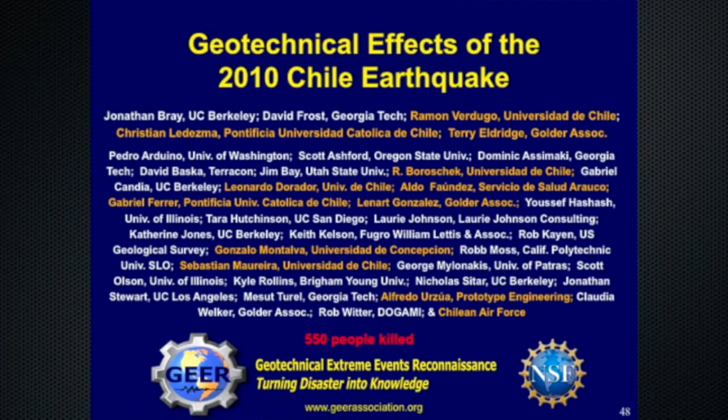Why this event was important is because we'd had a number of earthquakes that were intense, but they weren't of long duration. This thing was relatively intense, but very long duration, and that's why we mobilized for this event and the Tohoku earthquake.

I felt when I led the main team in terms of capturing this data that I was doing the Northridge earthquake, the Landers earthquake in 1992, and the Loma Prieta earthquake all at the same time.

I got really good at texting, because when you're driving through mountain roads, you could send GPS coordinates to team members and say, go here, and they can go there. Communications are critical.

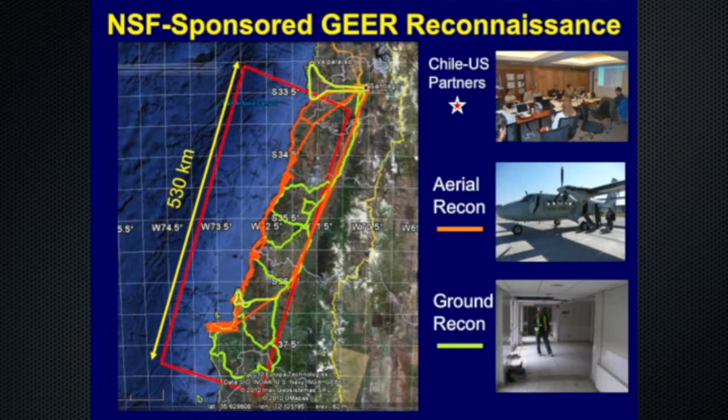One of the most important things was right off the bat, we started with meeting with our Chilean partners and understanding what was the geology, where are the maps, where do you think there's issues, and then getting up in the air. The orange lines are the aerial reconnaissance, and then eventually you need boots on the ground. You need people to actually go to the site and make the measurements.

For example, Kyle Rollins, working with others, doesn't just take this picture, but he takes the time to do detailed surveys on a couple of lines so that he knows he can develop this as a lateral spreading case history. Then he gets NSF money and goes back a couple of years later and does CPTs along this to characterize the site.

The whole idea is you can't have the case history without that perishable data. And it needs to be quantitative, not just qualitative. Then you're always surprised and you're looking for new things.

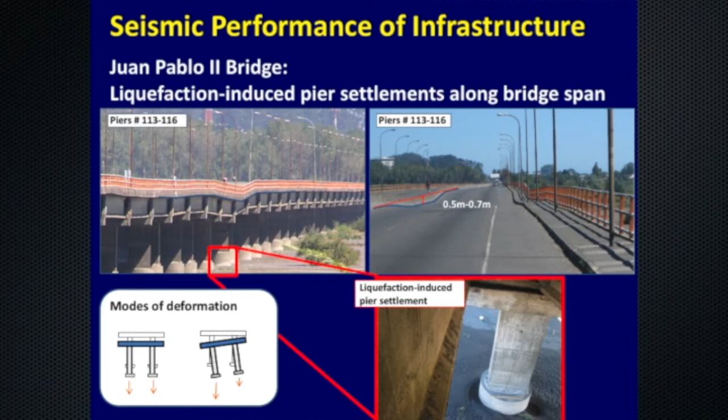One of those new things is Caltrans was always worried about, could a drilled pier from a bridge sink into liquefied material? That's no longer a theoretical question. The Juan Pablo II bridge had liquefaction at depth. The liquefied material came up along the drilled pier and it settled on the order of half a meter to seven-tenths of a meter, causing the deformation you see here.

I'm very interested in soil structure interaction, and that means you have to have soil engineers like Bray and Arduino, and you have to have a structural engineer like Tara Hutchinson, working with a structural engineer from Chile, to be able to document a case history completely.

We spent all our time on the outside of the building, looking at ejecta and measuring deformations of the building relative to the ground. Tara and her fellow structural engineers spent all their time inside the building, documenting cracking of coupling beams and other types of wall systems.

Then you can put all that together, and now you have a case history that says, on these ground conditions, which we can later go back and capture - we've done that through CPT and Swedish weight sounding - we can sit there and ask, can we capture this 40 centimeters of settlement, this about 30 centimeters of settlement, and this 10 centimeters of settlement, and the twisting and rotation which damaged that coupling beam.

The last event to talk about is the 2010-2011 earthquake sequence. Professor O'Rourke already talked about that. First, it would not have happened without Professor Misko Cubrinovski of the University of Canterbury. Russell Green was the leader of the GEER team from Virginia Tech. I jumped into this thing. We had Brendan Bradley, we had Professor O'Rourke, et al. It's a host of people that made this possible.

I was actually doing centrifuge tests, and it takes a lot of work to build a device, build an experiment, and do that test. I was doing this at UC Davis. You're not going to just shake it one time. You're going to shake it with a lower intensity motion so the pore pressures just build up a little bit. Then you're going to shake it a little bit more intense, and a little bit more.

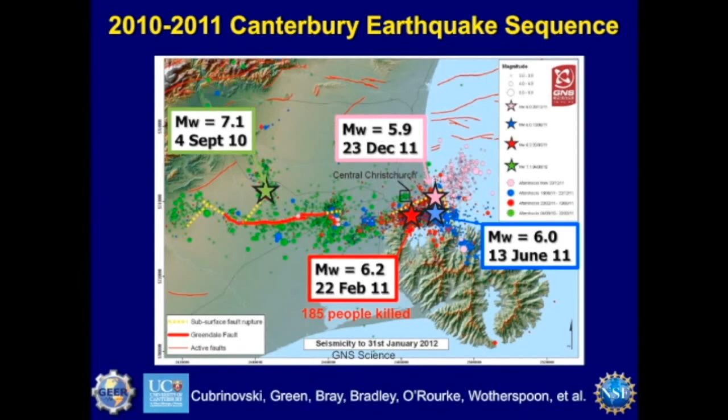It was the most widespread liquefaction that I'd ever seen. In fact, the only time I've seen something like this was in a snowstorm in Buffalo, when they piled up the snow after the event. But this is sand taken by people from their yards and houses and brought to the streets to be carried away. It's one thing when liquefaction takes your ride. It's another thing when it takes your throne.

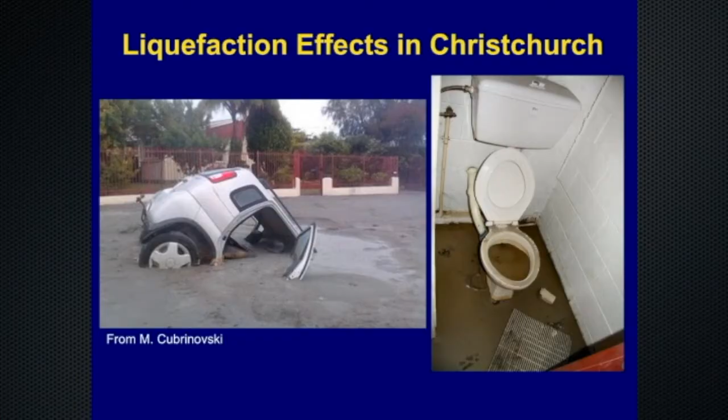If you look here, it's not just the sand, but one thing I recognized after having been in Katrina, this was a flood event - that's the water line. These people had had a lot of damage for September 2010. They finally dug all the sand out, got rid of all the damaged carpet, and moved back in. They celebrated Christmas, and kissed their significant other, or partner as they call them there, on Valentine's Day.

Then just a few days later, they had the 22 February 2011 earthquake, and it happened again. And it happened again on 13 June 2011. People moved from this city - it was the second largest city by population in New Zealand, and it became the third largest because people moved out of the area. They got fatigued by liquefaction.

I focused on the central business district and looked at buildings that slipped, tilted, had differential settlement, pile-supported structures where the ground moved down, but very importantly, structures that had no damage or negligible damage even though there was liquefaction, because they had drilled piers that took it to greater depth. I didn't know that at the time, but I said that's important - liquefaction at the site, yeah, I see no structural damage. We can figure out the why later.

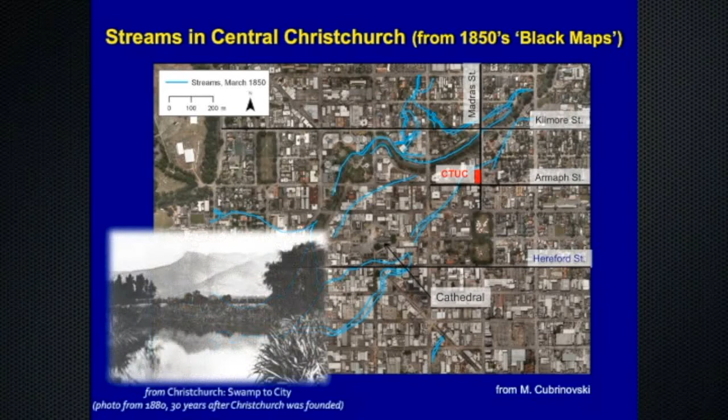In fact, I'll focus on this CTUC building. I learned much from a book called Christchurch, Swamp to City. That's what that city looked like in 1850. So it's very important to remind yourself of that when you're basically looking at the ground damage.

The survey of the CTUC building was actually captured - I didn't have structure from motion or LiDAR at that time. I found that I could go to Home Depot and buy a laser level, and by putting it on a platform, using what I learned from Surveying 101, I could basically measure differential settlement. There was a pipe connecting this building, which did not punch into the ground, relative to that building - it moved 60 millimeters relative to that one. Then I could measure the differential settlement between these bays, separated by about 4.5 meters.

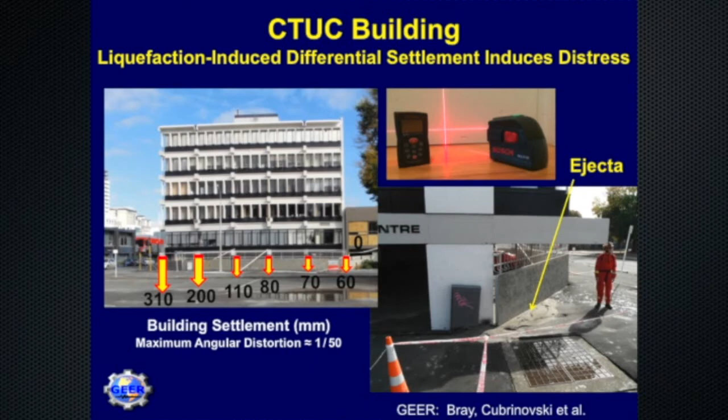You can see it's relatively low angular distortion until you get to the last two bays. What's special about the last two bays? We're going to find out. And it's not surprising to see cracking, and of course there's the extra damage of the ejecta.

I saw very quickly that the ground conditions were highly variable in Christchurch, so we did closely spaced CPT across this feature, which had severe liquefaction, and this is where that shallow stream channel was. It's not there, and it's not there, but it's right here, and it just clips the edge of the building. That's why we had such severe settlement on the edge of the building, the southern part. These are the CPTs on the south side, in the middle, on the north side, and then on the north side of the other building we're using as a frame of reference.

I've highlighted in orange those areas of silty sands that should have liquefied by our prevailing techniques, and we have liquefaction at depth throughout this area. What jumps out in red is this shallow liquefaction directly beneath that end of the building. That shallow stream is not in these other locations, but it is over here, and that's why you have the damage there - not just because of volumetric settlement, not just because of shear, but also because of ejecta.

With that case history, you start with the observations, then fill it in with some CPTs, then we came back and did borings, then we do laboratory testing - we've had an army of soldiers march through this problem.

Then we finally say, okay Roberto, now we're bold enough with a calibrated model of PM4 sand working within FLAC to do an analysis of this building and see if we can capture the deformation of the south side relative to the north side. Because now we calculate that the north side should have moved, and it did move down, punch down some, the 60 millimeters or so, but the south side settled significantly more. And we pat ourselves on the back that our model does not calculate what was measured.

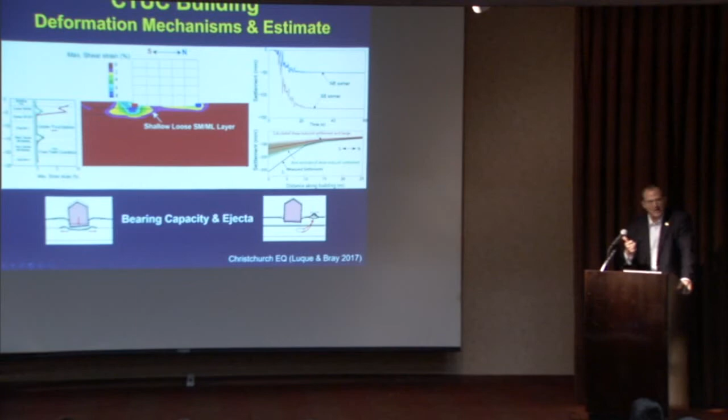It shouldn't, because my continuum-based model can capture volumetric and shear deformation, but it cannot capture ejecta. So if my model matched what was measured, I'd be wrong. Once I estimate how much ejecta came out of the ground and how much shear-induced deformation, then I get the right answer. There was no ejecta on the north side, but significant ejecta on the south side. So it's important to realize what your model does do and what it can't do.

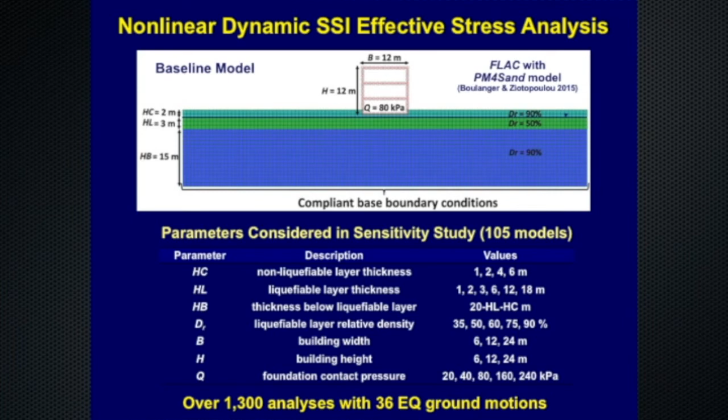Looking at a few other case histories and also the previous work we've done, we said now we're bold enough to do a lot of analysis and really see what matters. We trust the model enough to run a sensitivity analysis and look at different thicknesses of liquefiable layer, different thicknesses of non-liquefiable layer, different relative densities, different widths of foundation, different contact pressures, different heights, different ground motions.

We run all those different ground motions through this array of different cases to see what's important. The analysis clearly shows that largely it's shear-induced deformation, not volumetric, that governs building behavior during strong shaking in those cases where ejecta is not significant. Obviously, if the ejecta is significant, that kind of rules the roost.

It was important that certain key ground motion parameters, cumulative absolute velocity and the spectral acceleration at 1 second, were the optimal ways of characterizing the seismic demand. In terms of site parameters, relative density of the liquefiable layer, the thickness of the liquefiable layer, and the thickness of the non-liquefiable crust, because that positions where the liquefiable layer is, were key site parameters. And in terms of building parameters, the building pressure, the contact pressure, and its width were important.

We tended to find, just like you use base heave calculations for excavations, if the factor of safety, static, post-liquefaction factor of safety for bearing capacity was low, you had a problem. You had large deformations.

With all that data, I don't want to go through the details of it, how we start with those case histories, and we do all that field work, we do all that laboratory testing which supports all the analysis with enough confidence in the analytical method. We then run all that sensitivity analysis, and we come up with a way for engineers in a simplified way to get an initial assessment of what the shear-induced settlement will be.

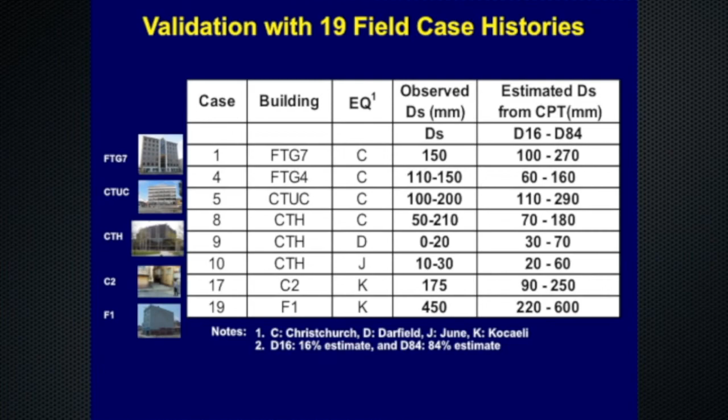I have ground motions from the Kocaeli earthquake in Turkey. I have ground motions from the Christchurch earthquake in New Zealand, the Darfield earthquake, the June event. I have these case histories where I have good confidence on estimates of the observed shear-induced deformation, and then I can check it against this simplified method, and I find a consistent development, a consistent estimate. So we start with the field case histories, which is because GEER people dropped everything and went out there and captured this perishable data.

That started it all. And then after we come up and we're bold enough to make an advanced method or a simplified method for estimating settlement, we come back to these well-documented case histories to say, does this make sense or not? Would you as a practicing engineer use this method? Only if it makes sense against the field case histories. So it starts and ends with the field case histories.

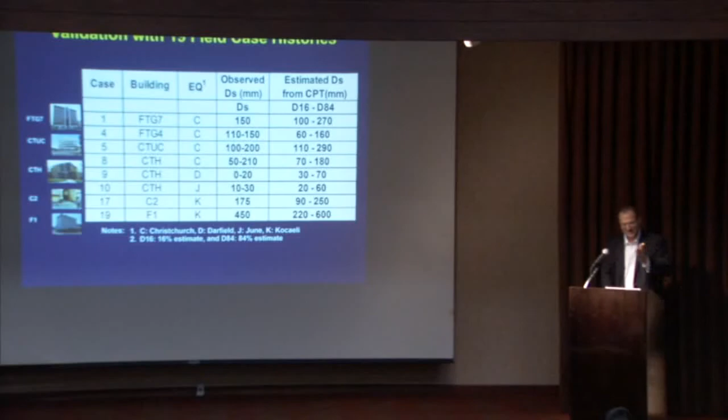So in conclusion, turning disaster into knowledge. A well-documented case history, as the geotechnical engineers in the room all understand, that's the key to our profession. That's the cornerstone. That's why we're so focused on the field, because we want reality, which can't necessarily be replicated in the lab or in the computer. Having well-documented case histories allows us to move forward in understanding extreme events and their effects.

Reconnaissance is clearly no longer about taking notes and taking your own slides. It's about everything digital and sharing everything. It's about everyone having a UAV and capturing key data that allows them to capture the quantitative data that makes an excellent case history. Everything is geocoded.

You will not see a GEER report where an observation doesn't give you GPS coordinates. If you can't go back and reoccupy that site because you don't know where it is, you're not going to be able to capture that.

In fact, I learned that the hard way when I was flying in the helicopter with Professor O'Rourke. We crossed paths all the time after the Kobe earthquake. I saw surface fault rupture go through a tennis court. I don't know if you slice, but if you sliced, you'd like to play on this court, because the right lateral allowed you to slice and get your ball in.

So I asked the pilot while we were up in the air, do you know where that is? He said, yes, I know where that is. So we land on the ground, and I go, where is it? And he goes, it's here. It took me six hours on the ground to find that tennis court.